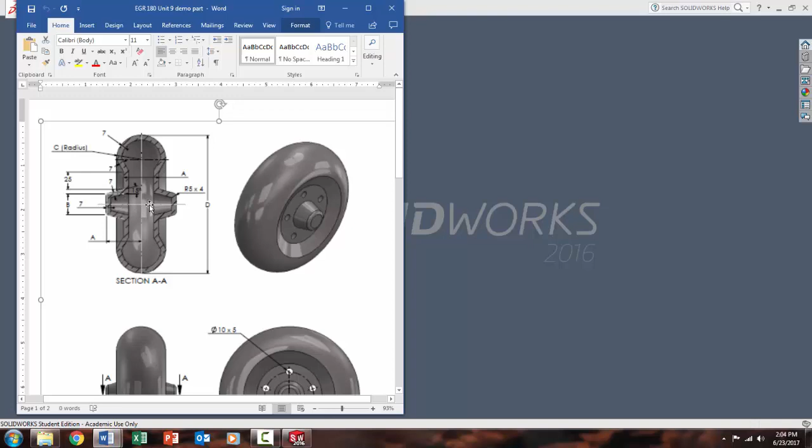I'm going to do an advanced part for you and also talk about moving coordinate systems. I'm going to model this beast for you. It looks a lot harder than it is. I'm actually going to draw 1/4 of it, use dynamic mirror to complete the other, and then revolve it around that axis. That doesn't sound too hard, does it?

Alright, so let's go into SolidWorks and get rolling. Alright, this part happens to be metric. It is made out of brass. I'm going to turn on my origin, and I'm also going to select that plane to work off of.

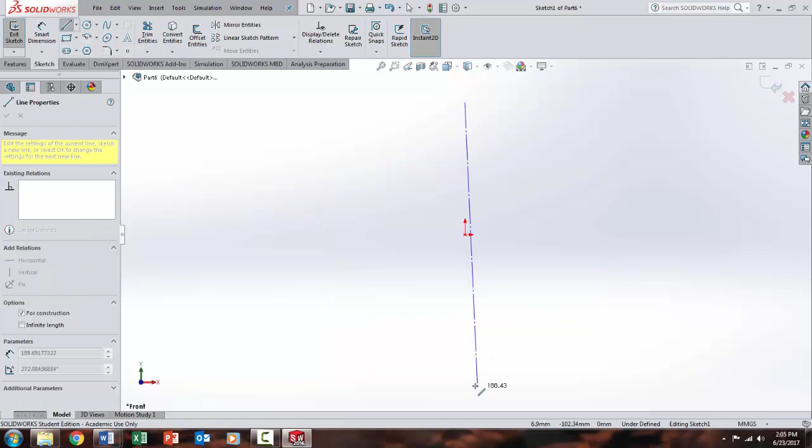The first thing I'm going to do is draw a couple of center lines. You can tell these are construction geometry, right? Because they're dashed like that, they're not going to figure into anything much here. Okay, like that so far.

So there's a couple things I want to do right off the bat. I'm going to dimension from here to here. I want that to be, let's pull it over here, 100 millimeters, and that's a happy thing.

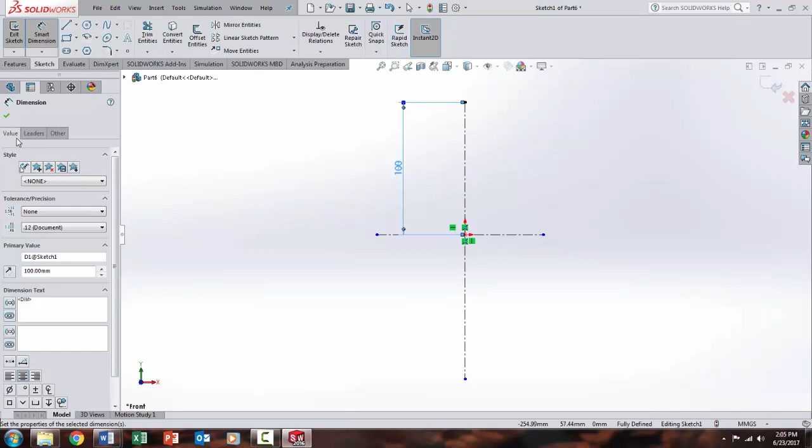What else shall I do? Okay, let's start by drawing this arc here. I'm going to lock that in. I'm going to draw 1, 2, 3, 4 lines, throw in a radius. Geez, shouldn't be all that hard.

So let's start with an arc. I'm going to actually do this kind. I'm going to come up here at the top, come over here somewhere, and leave it just about like that. Actually, you know what I forgot to do? Geez, look at me, I forgot to turn my dynamic mirror on, because I actually want that to be working.

It's down in Sketch Tools, Dynamic Mirror. What does it want to mirror about? I want you to mirror about that way. Those little dash lines there tell you your dynamic mirror is on. So if you hit Control Z right now, that goes away. So keep an eye on that. If that isn't on, it's not going to mirror everything that you do.

So whatever I draw on this side, it's going to draw over here for me automatically. So hey, there's a lot of things we really like about SolidWorks. This is one of them.

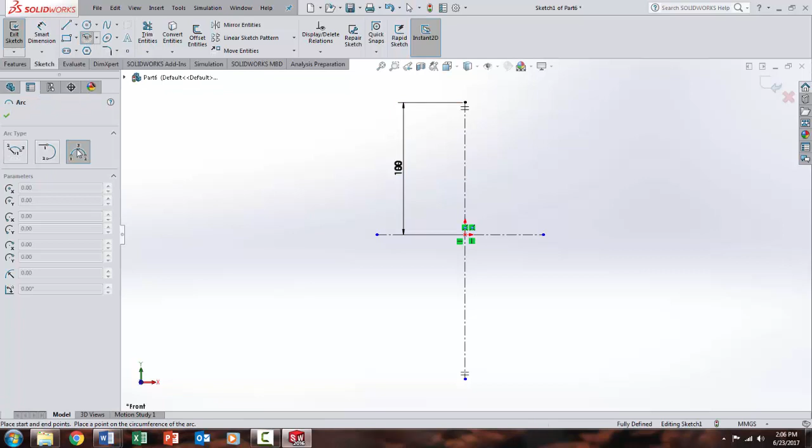Alright, back where I was, going to start here. Going to draw something about like that, and I'm going to leave that as it. Now notice it automatically draws that for me over there, as I said. Pretty nifty. A couple things here though.

I want these two to be coincident. I want everything here to be horizontal. So I'm going to zoom in there a little bit so you can see what's going on. I want that, and I want this to be coincident, and notice it does both sides for me at the same time because it's symmetrical.

And now if I come up here and select this guy, and I select this guy, and I say, hey, I'd like you to be horizontal, it makes them both horizontal. Kind of nice. Alright, like that so far, so easy.

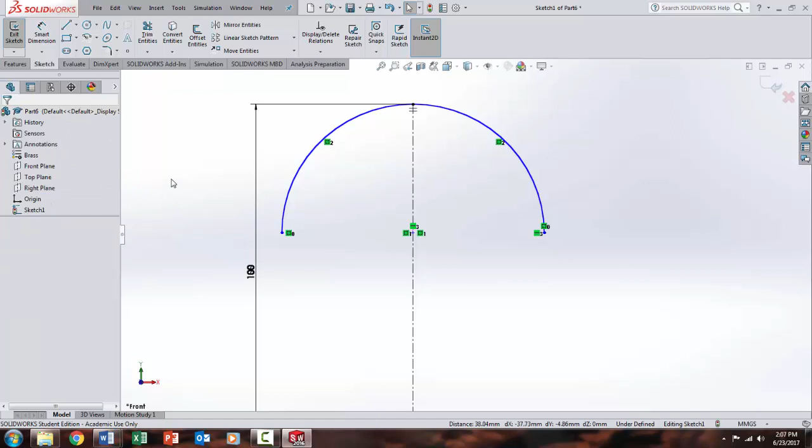Gonna dimension this bad boy. It is 35 millimeters. And right now I have a fully defined sketch so far. Hey, this isn't too bad, is it?

Alright, so I notice my dynamic mirror is still on. I'm going to draw those lines I talked about. So there's one here-ish, and then there's another long one here, and then this guy comes out over here, and then one comes perpendicular down to that. Okay, so what I want to do is make sure that these guys all stay on this line.

So I'm going to click on that point and my origin, and that point, and tell them I always want you guys to be horizontal, so they will stay horizontal no matter what I do. All right, let's throw some dimensions in.

From here to here, I believe is 25 or 50 between the two of them. Doesn't matter either how you do it. There's 25, and the actual length of this... nope, stop it, be good.

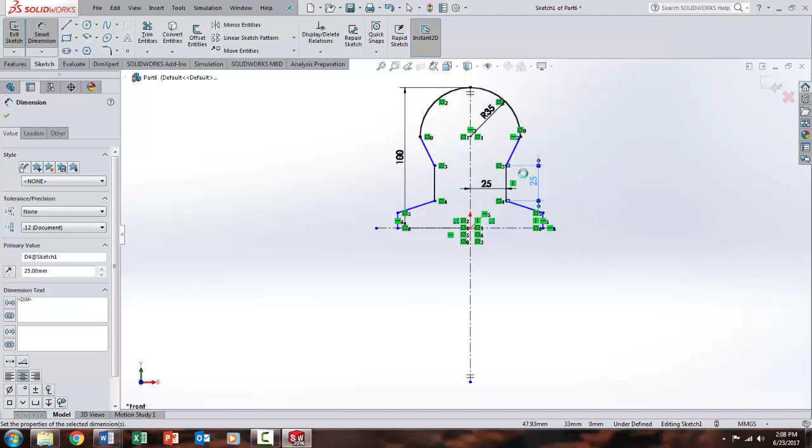Yes, the length of this is also 25, and that's nice. And the length of this — zoom in a little bit — length of this guy is, the heck is that? All right, length of this guy, dude, what are you doing? That's kind of fun, I've never seen that before.

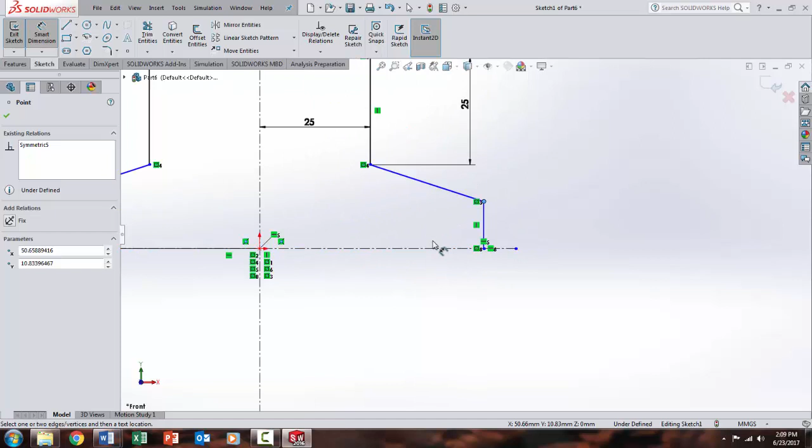Is my dynamic mirror still on? Yes, it is. Come back in here. Escape again. There we go. This one is 15, if I am correct. I think I am.

And what else? So I need to go from here to here, and that wants to be 50. Notice again, it's still doing both sides for me. I think all I really have left to do is set this angle between these two, if it would let me — would be nice.

Let's try that again. This line and this line. No. You know, sometimes SolidWorks does make you wonder, doesn't it? Let's try that again. Let's try this line, this line.

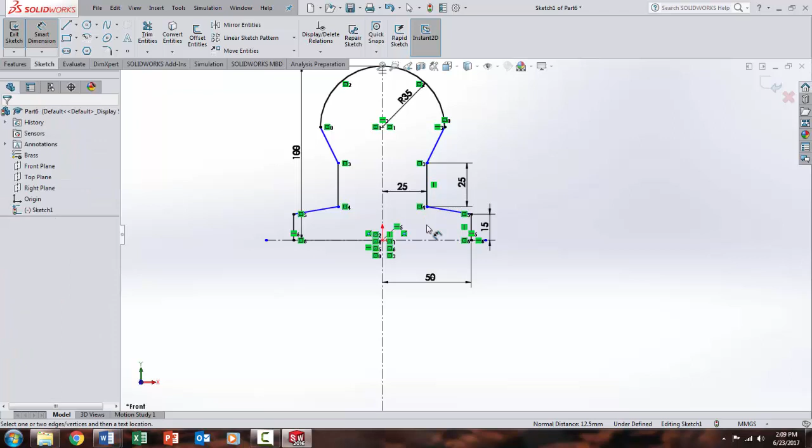You know what, I'm going to drop out of that — there you go — and come back into it. Oh, let's try it again. This line, this line. No? I don't want line properties, guys, I want dimensions. Work with me here. No, I don't want that either.

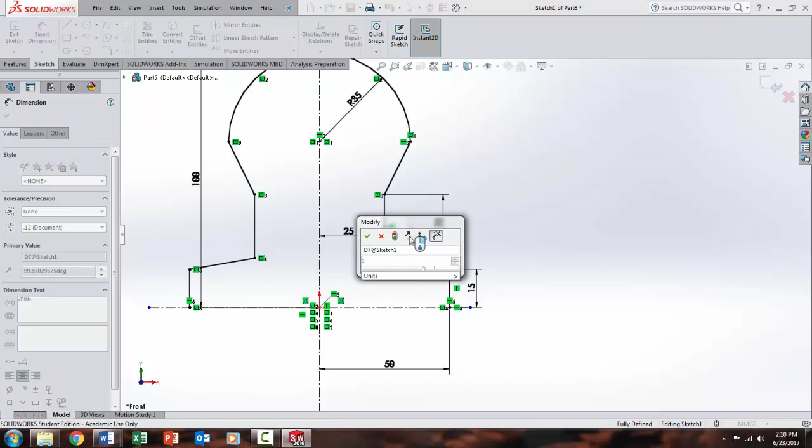There we go. And what I want here is 90 plus 15, so that should be 105. And ta-da, fully defined sketch. Still in happy mode up here. Dynamic mirror is on.

All I really need to do is add a little fillet right there, and I want that to be 5. And that is correct. For some really weird reason, it didn't do it over here, so I'm going to go over here and put it there too. I don't know why it didn't do that with the dynamic mirror on.

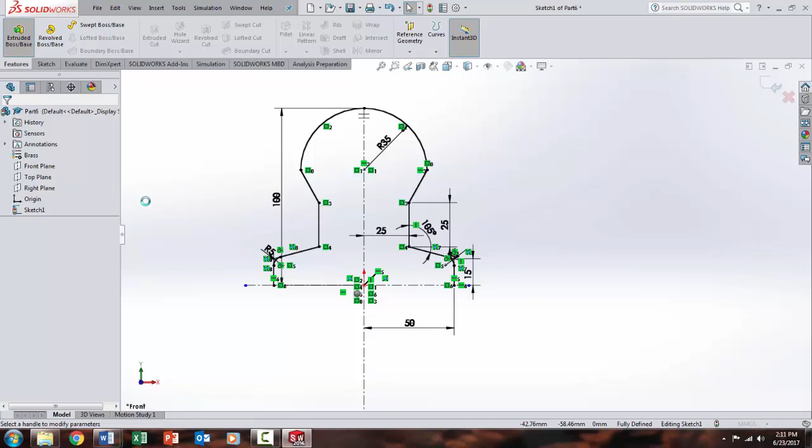All right, so at this point in time, it's ready to go. I mean, it's not so bad. So if I go into features and say let's do an extruded boss base — no, I don't want to do a boss extrude, guys, I want a revolve boss base. That's what I want.

Sketch is currently open — do you want us to close it? Sure. And what's it want? Axis of revolution, that's this line. Hey, boom, there it is. That wasn't so hard, huh? And if you say yes, it's happy.

Now I'm going to do this just so you see what happens, all right? Because there's something here you might think — if you look at the illo again, you can see it's hollow on the inside. So you might be thinking, well gosh, I'm just going to use the shell command. Well, guess what? For some really weird reason, SolidWorks won't let you.

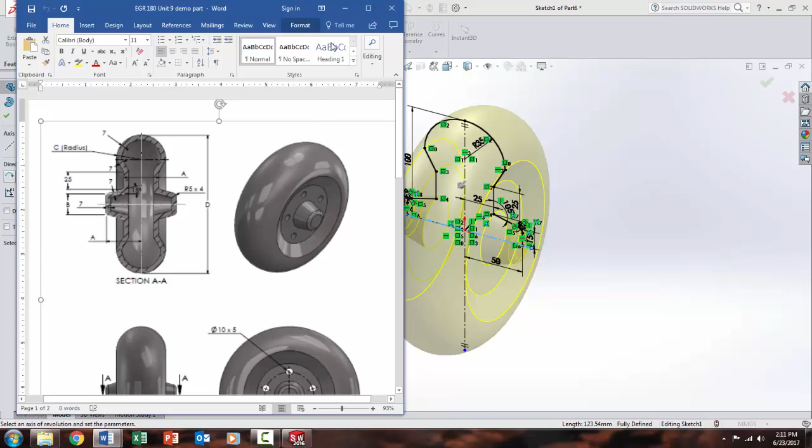So I'm going to show you what happens when you try to do that. There you go. Hey, lovely, lovely — looks just like it. All right, well, it would if I put it in. There you go, how about that? Looks just like it. The only thing I haven't modeled yet are the little holes here, and I don't really care about those — not terribly important.

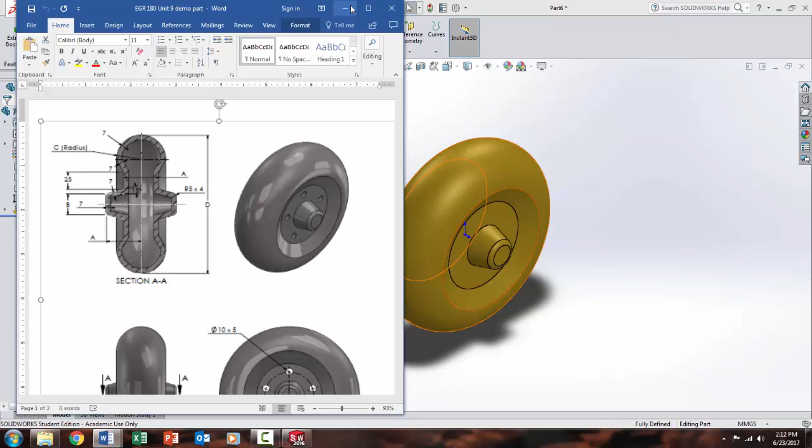Okay, so we think, aha, all I have to do is shell it now. So we click the shell function. And what faces do you want to do? Geez, I want to do that. I want to do that. I want to do that. I want to do that. I want to do all this stuff.

I'm going to shell the heck out of this thing, and don't forget these guys on the back. So you say yes, yes, yes, yes, yes, shell everything. And you want it to be 7 millimeters, which is what it's spec'd at.

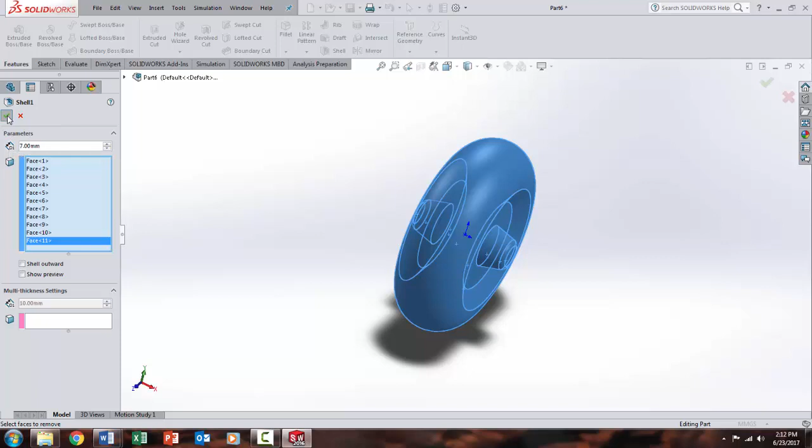And you say okay, and you click it, and it says: thickness value is greater than minimum radius, shell makes bad geometry. But doesn't work. So here you are, it's basically saying I'm not doing that. You can piddle with it, and it's not going to do it.

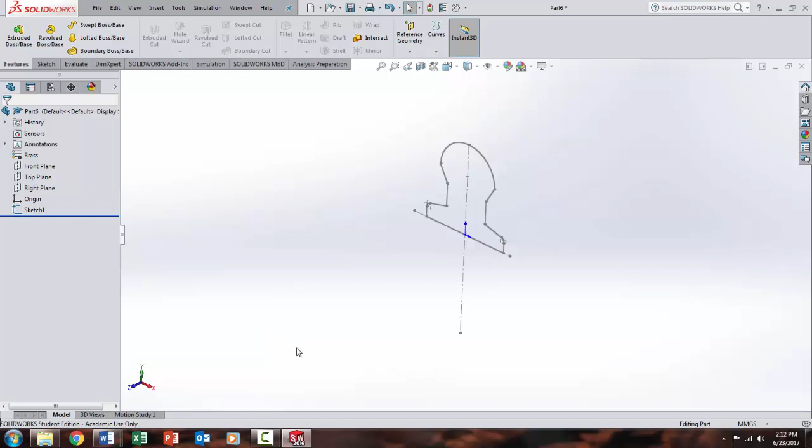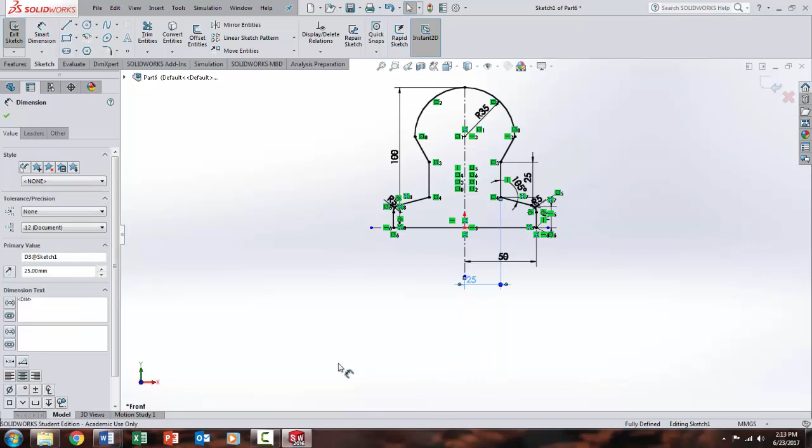So we go back to our sketch. If it's not going to do that, what can I do about this? Let's go back and edit my sketch, normal to it, fit it to the screen. Actually, it's having a problem because this thing is so long here. If I say fit, you're not going to let me do that. I got weird measurements down here. How about now? No, it still doesn't like it. All right, so we'll do it ourselves manually.

Please notice that when I tried the revolve feature, one of the things it did is it put this line in here. I don't want this line here right now, and I'll show you why in a minute. So I'm going to click on that and say go away. All right, so that's gone, but I still have my axis of revolution here.

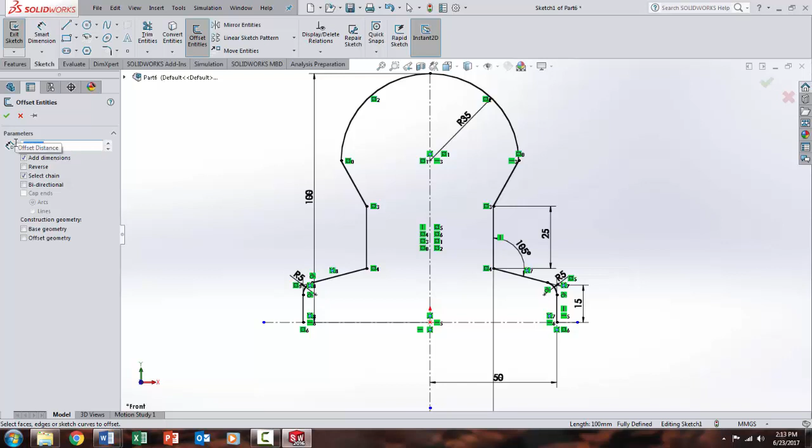So my other option to shell this thing is to use our good friend offset entities. I want to select a chain, yes, I do. I want it to be 7 millimeters. And let's say that, and there it is, but I want to go the reverse of that. So I click that, and bada bing, bada boom. And you might say, there it is, ready to go.

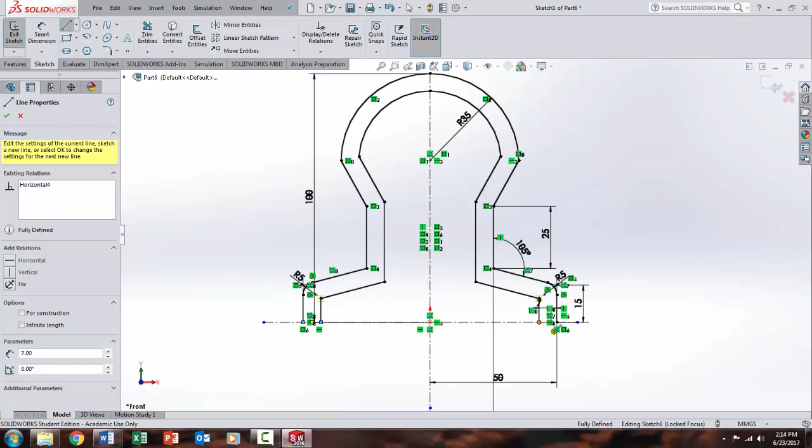Well, I hate to tell you this, but SolidWorks won't revolve this because this isn't closed. So what you've got to do is come in here and draw a couple of little dinky lines, one right there and one right there. And now, I don't want to do that, get out of here. It should work.

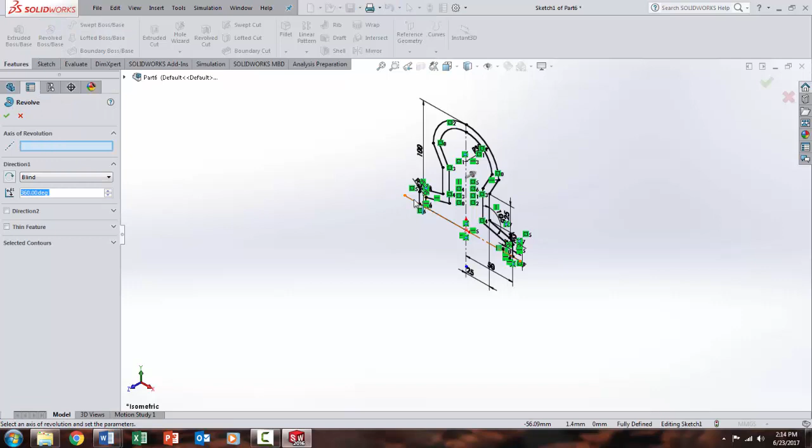So let's try it. Let's go back into features, put this thing in ISO for you. Let's try the revolve base, and axis of revolution again is this little dude. And bam, as soon as it shows you, you know you're in great shape. So click that. There it is.

It's happy, really happy. How do you know it's hollow on the inside? That's where your good friend up here, the section view, is. Hey, and there's your section view. You can see that it's fully shelled.

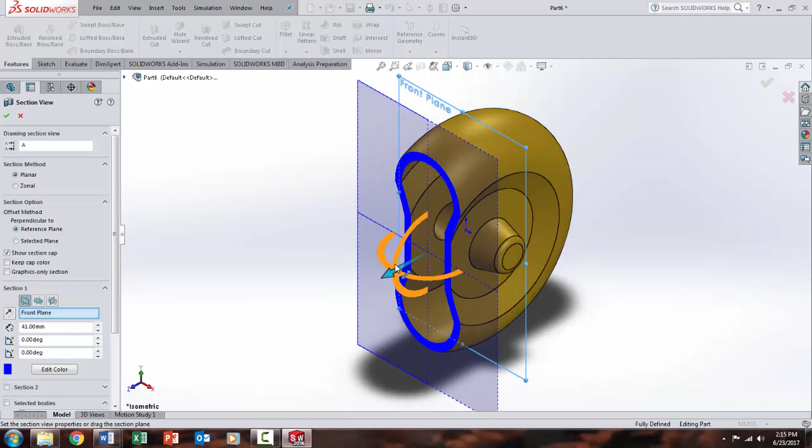Pretty slick. So what you have to do is when you get into like the CSWA and you try to do something and it won't let you, and you try it maybe twice, well then it's time to figure out a different way to do it. So just be aware that that kind of stuff happens.

I'm going to save this part right now, and let's call it, let's put it on the desktop, we'll call it EGR 180 unit 9 part demo. All right, I'm going to save that for now.

And then I'm going to bring this up. I'm going to do a separate segment where I actually do the goofy little slots in this thing. It's not that hard either. So that's it for now, just want to keep this one short.

Hopefully you realized it's not so hard when you use all the tools that SolidWorks offers at your disposal. Just don't freak when something doesn't work. The solution is to try and find an alternate means of doing it.